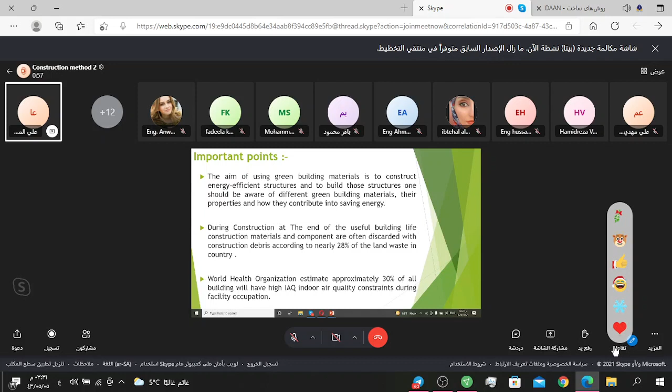Be aware of different green building materials, their properties, and how they contribute to saving energy. During construction, at the end of the useful building life, construction materials and components are often discarded, with construction debris accounting for nearly 28% of the land waste in the country. The World Health Organization estimates approximately 30% of all buildings will have higher indoor air quality constraints during facility occupation.

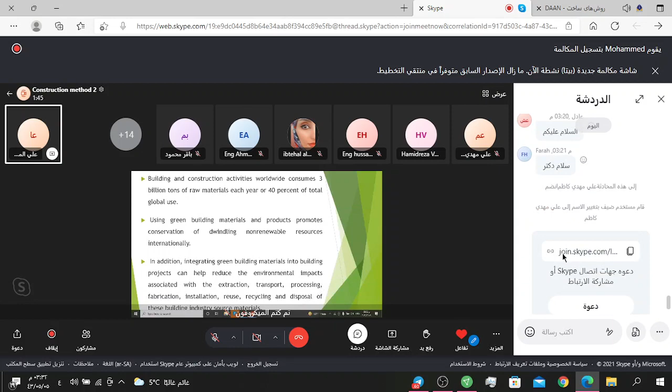Building and construction activities worldwide consume 3 billion tons of raw materials each year, or 40% of total global use. Using green building materials and products promotes conservation of dwindling, non-renewable resources internationally. In addition, integrating green building materials into building projects can help reduce the environmental impacts associated with the extraction, transport, processing, fabrication, installation, reuse, recycling, and disposal of these building industry source materials.

Fundamental principle. Are you hearing me, Doctor? Please.

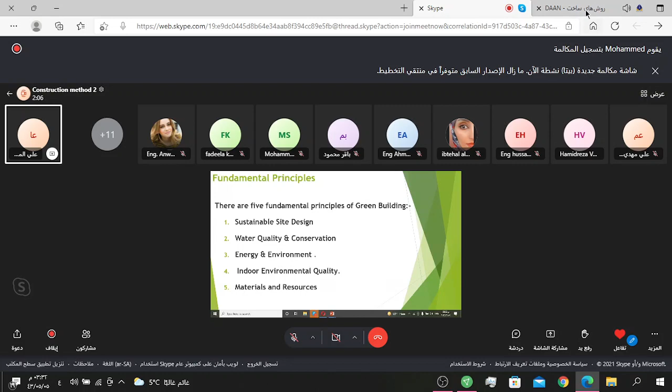There are 5 fundamental principles of green buildings: sustainable site design, water quality and conservation, energy and environment, indoor environmental quality, and materials and resources. Sustainable site design: create minimum urban sprawl and prevent the needless destruction of valuable land, habitat, and open space. Encourage higher density urban development as a means to preserve valuable green space. Preserve key environmental assets through a careful examination of each site.

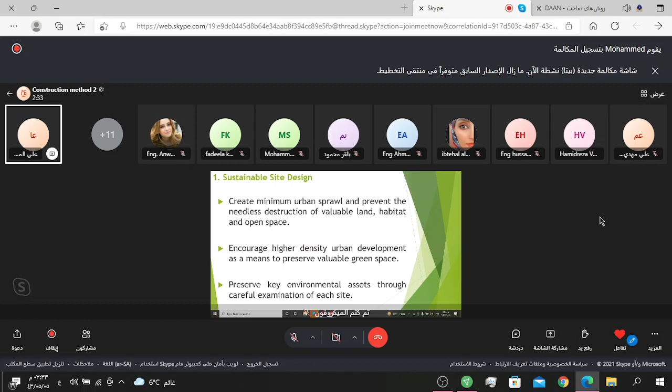Water quality and conservation: preserve the existing natural water cycle and design the site so it closely emulates the site's natural hydrological systems. Emphasis on retention of storm water and on-site infiltration, as well as ground water recharging. Minimize the inefficient use of potable water on the site, while maximizing the recycling and reuse of water, including rainwater harvesting, stormwater, and grey water.

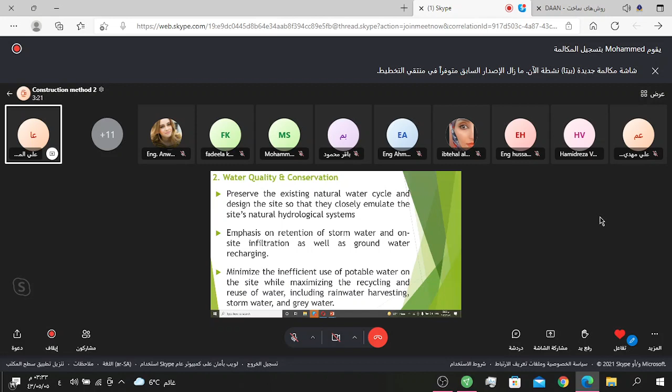Energy and environment: minimize adverse impact on the environment through optimized building siting and design, material selection, and aggressive use of energy conservation measures. Maximize the use of renewable energy and other low impact energy sources. Building performance should exceed minimum international energy code compliance levels by 30 to 40%.

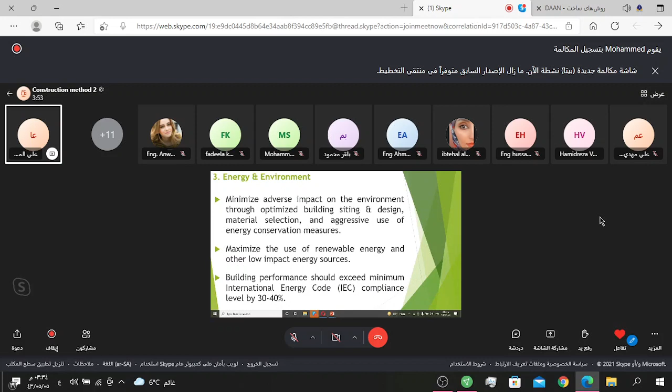Indoor environmental quality: provide a healthy, comfortable, and productive indoor environment for building occupants. Utilize the best possible conditions in terms of indoor air quality, ventilation, and thermal comfort, including access to natural ventilation and daylighting.

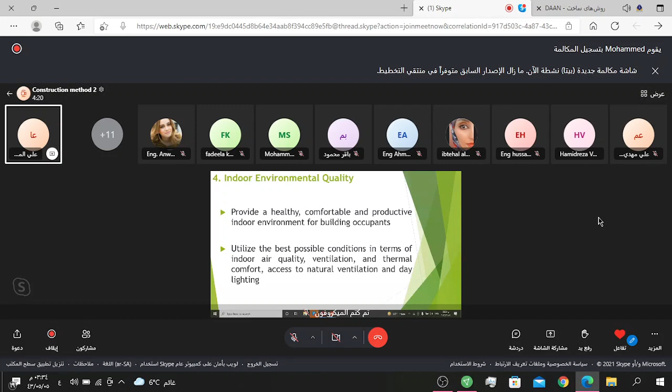Materials and resources: minimize the use of non-renewable construction materials through efficient engineering and construction and effective recycling of construction debris. Maximize the use of recycled materials, modern energy efficient engineering materials, and resource-efficient composite type structure systems, as well as sustainably managed biomass materials.

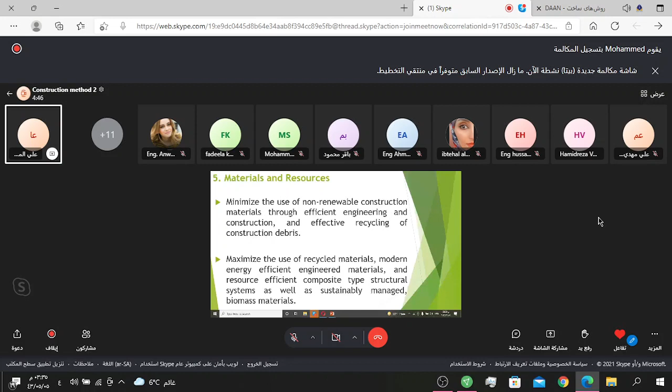Materials are okay. Selection criteria for green building: resource efficiency, indoor air quality, energy efficiency, water conservation, affordability.

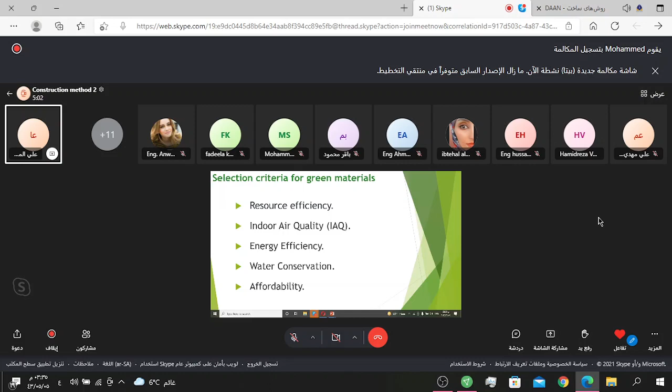Resource efficiency: recycled content. Products with identifiable recycled content, including both post-industrial content with a preference for post-consumer content, natural and renewable material harvested from a sustainably managed source, and verifiable having independent certification, for example certified wood certified by an independent third party.

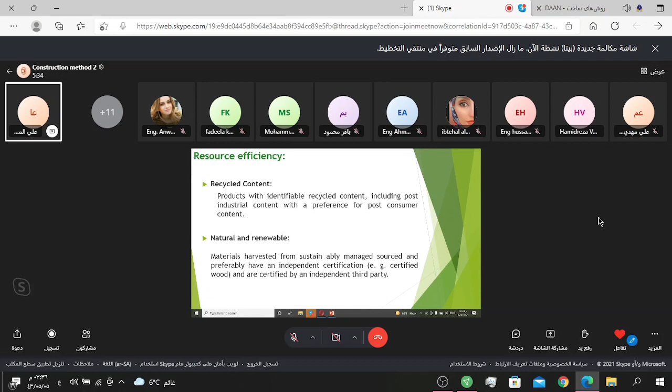Resource efficient manufacturing process: products manufactured with a resource efficient process, including reducing energy consumption, minimizing waste, recyclable and/or source reduced product packaging, and reducing greenhouse gases. Locally available building materials and systems found locally generally save energy and resources in transportation to the project site. Refurbished or remanufactured products include saving materials from disposal by repairing, restoring, or otherwise improving the product's performance, quality, functionality, or value.

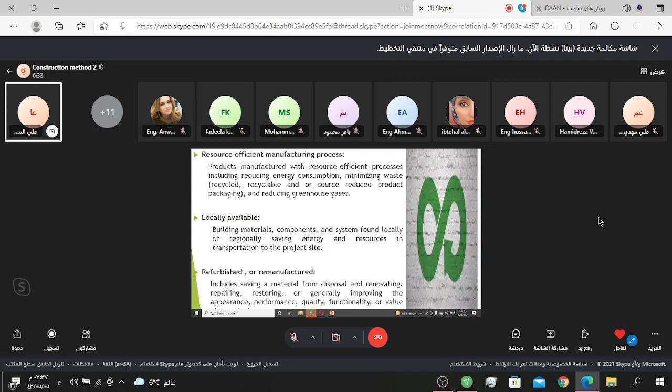Indoor air quality. Minimal chemical emission.

Products that have minimal emission of volatile organic compounds, and also maximize resource and energy efficiency while reducing chemical emissions. Moisture resistance: products and systems that resist moisture or inhibit the growth of biological contaminants in a building. Healthfully maintained materials, components, and systems that require only simple, non-toxic, or low volatile organic compound cleaning.

System or equipment: products that promote indoor air quality by identifying indoor air pollutants or enhancing air quality.

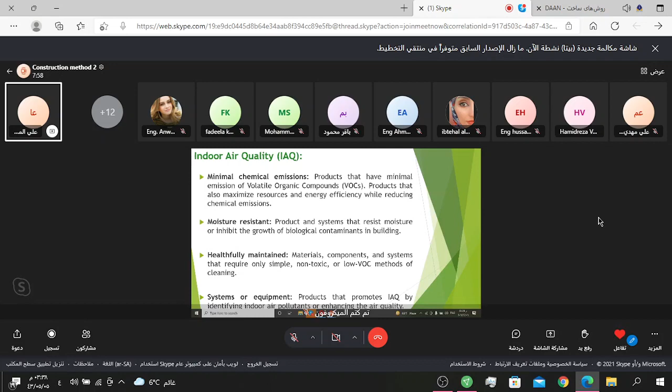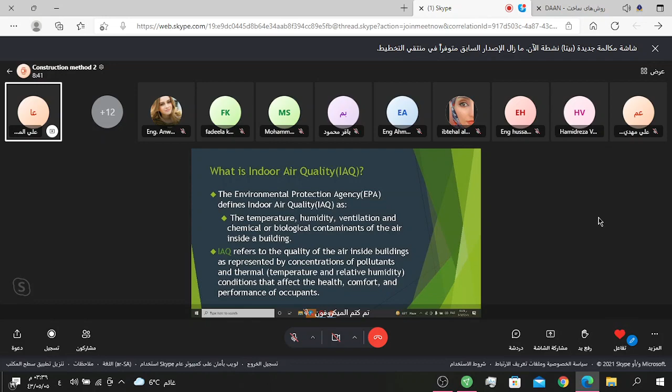What's indoor air quality? The Environmental Protection Agency defines indoor air quality as the temperature, humidity, ventilation, and chemical or biological contaminants of air inside a building. It refers to the quality of the air inside the building as represented by concentrations of pollutants and thermal temperature and relative humidity conditions that affect the health, comfort, and performance of occupants.

Energy efficiency: materials, components, and systems that help reduce energy consumption in buildings and facilities. Water conservation: products and systems that help reduce water consumption in buildings and conserve water in landscape areas. Affordability: building product life cycle costs are comparable to conventional materials and are within a project-defined percentage of the overall budget.

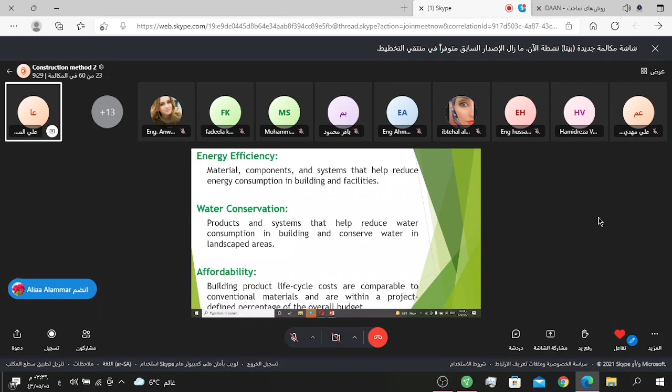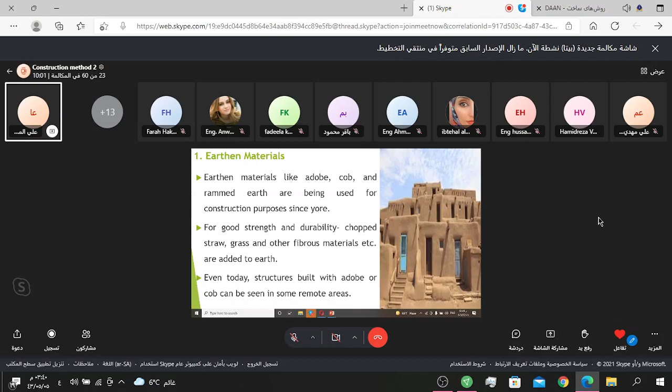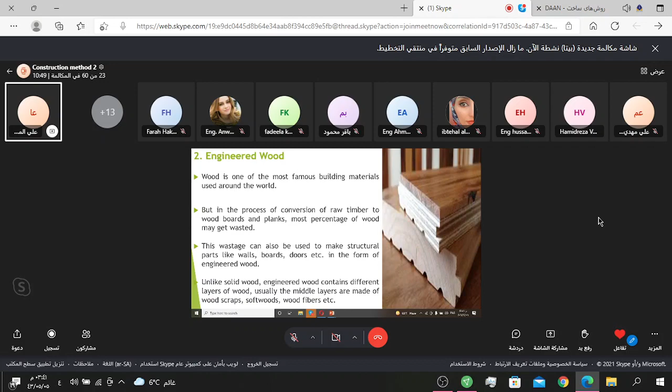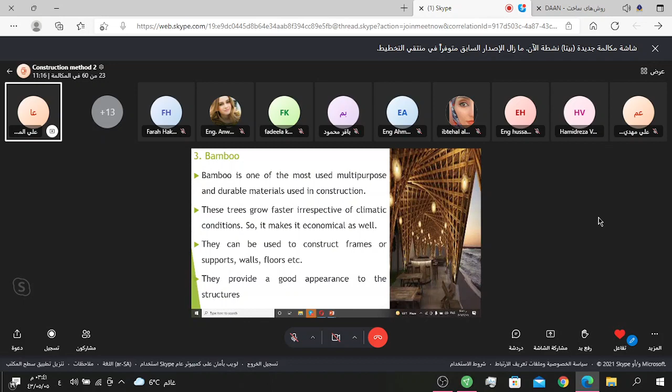Bamboo is one of the most used, multi-purpose, and durable materials used in construction. These plants grow faster irrespective of climatic conditions, which makes them economical as well. They can be used to construct frames or support walls and floors, and they provide a good appearance to the structure.

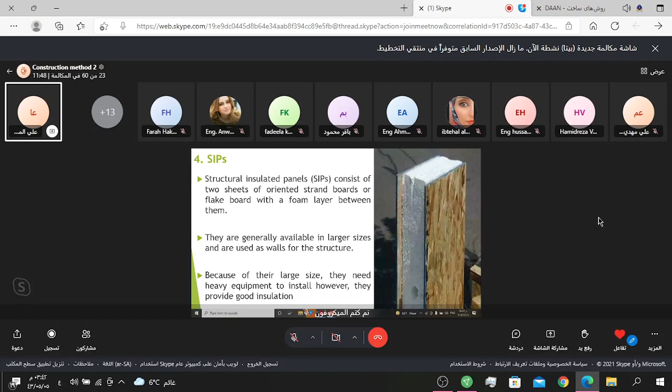Structural insulated panels consist of two sheets of oriented strand board or flake board with foam layers between them. They are generally available in larger sizes and are used for structure. Because of their large size, they need heavy equipment to install. However, they provide good insulation.

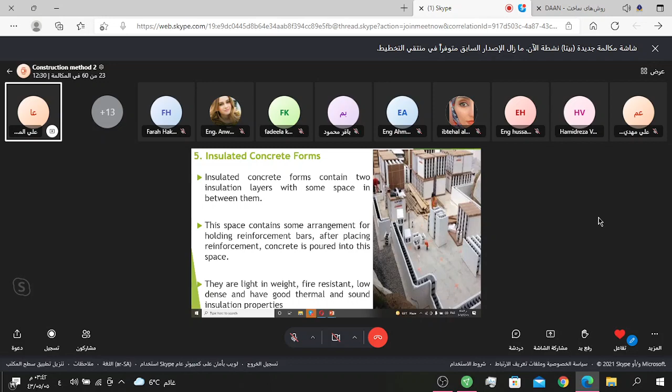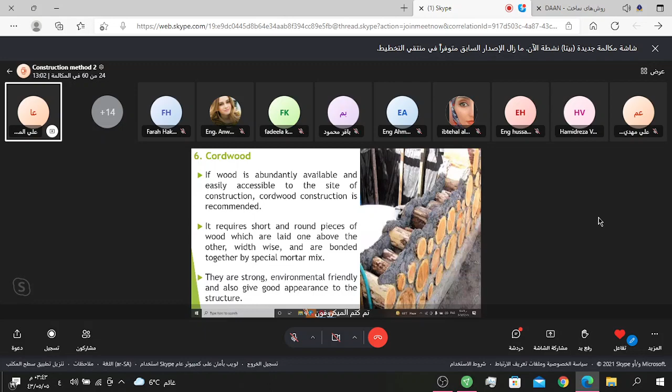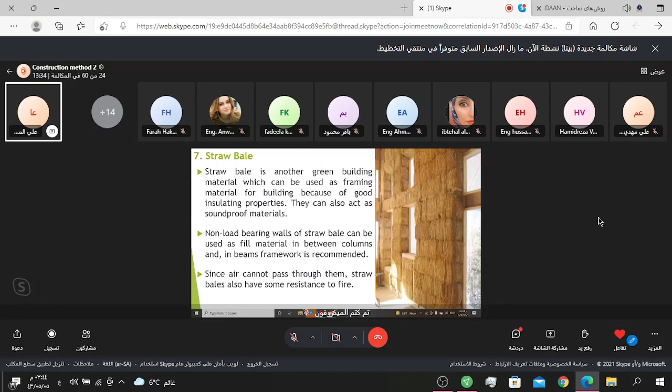Straw bale is another green building material which can be used as framing material for buildings because of good insulating properties. They can also act as soundproof materials. Non-load bearing walls of straw bale can be used as fill material between columns, and in beam framework it is recommended. Since air cannot pass through them, straw bales also have some resistance to fire.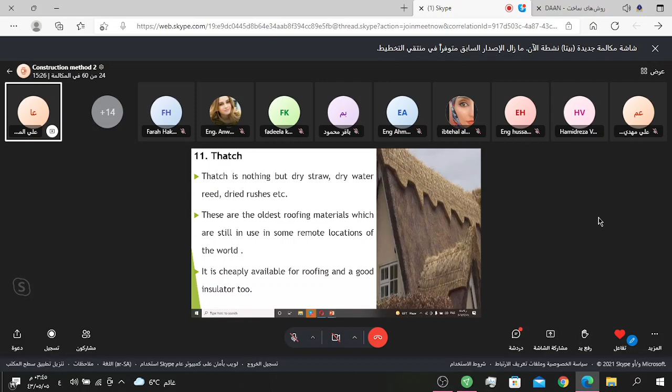Natural fiber, like cotton wool, can also be used as insulation material. Recycled fibers or wool fibers are converted into a batt and installed in preformed wooden frame sections.

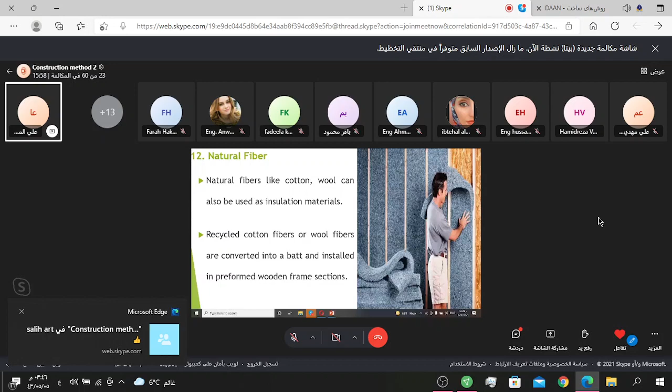Polyurethane foam is available in the form of spray bottles. It is directly sprayed onto the surface or wall where insulation is required. After spraying, it expands and forms a thick layer which hardens later on. It offers excellent insulation and prevents leakage of air.

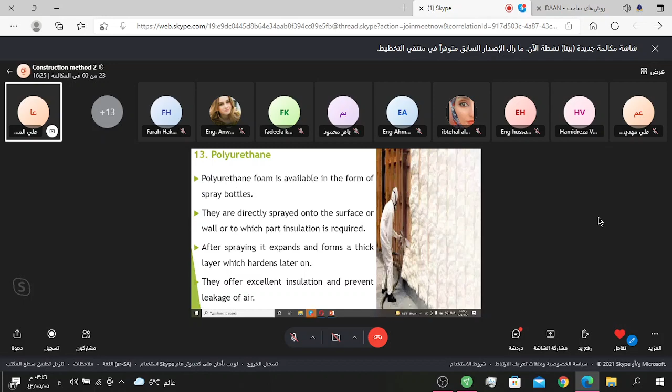Fiberglass is also used for insulation purposes in the form of fiberglass batts, even though it contains some toxic binding agents. Again, because of its superior insulation property at low cost, it can be considered a green building material.

Yes, Doctor. Fiberglass and the other material you explained about — can that cause cancer to the worker or someone who lives over there? There is... excuse me, Doctor, the sound is not clear. My sound is not clear. Yeah Doctor, not clear. Yes Doctor, please, how is it now? I can hear you perfectly. I explained that you explained about the fiberglass, yeah? What's Doctor? Yes. It may cause cancer for the worker or someone who lives over there — it's not suitable for the green building. Okay, yeah, okay Doctor, it's harmful for the... yeah, it's harmful, very harmful for the human over there. Okay, continue, go on please. Okay Doctor.

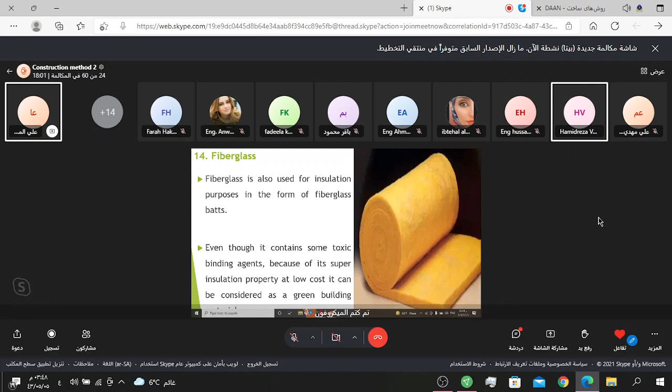Cellulose is a recycled product of paper waste, and it's widely used around the world for insulation purposes in structures. It acts as a good sound insulator and is available at cheap prices in the market.

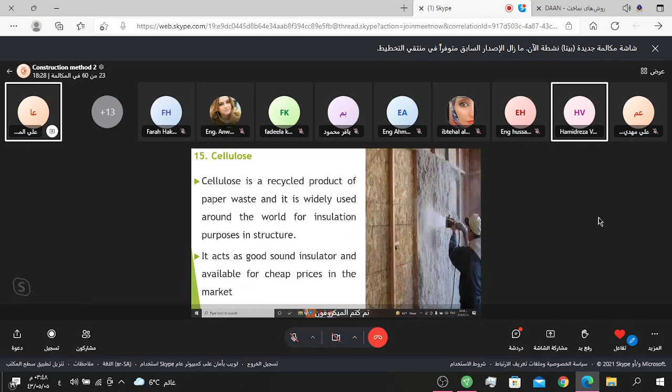Cork is also a good insulator. Boards or panels made of cork are available in markets. A great amount of electrical energy can be saved by cork board insulation in the winter. These cork boards are also good for sound insulation.

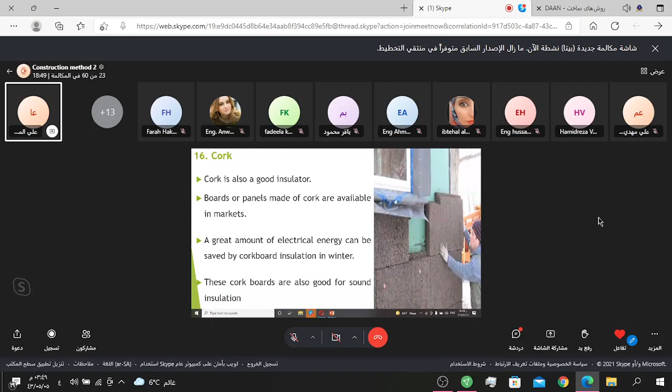Natural clay plastering of walls can be done using natural clays rather than other gypsum-based plasters. Natural clay plaster, with proper workmanship, gives a beautiful appearance to the interior.

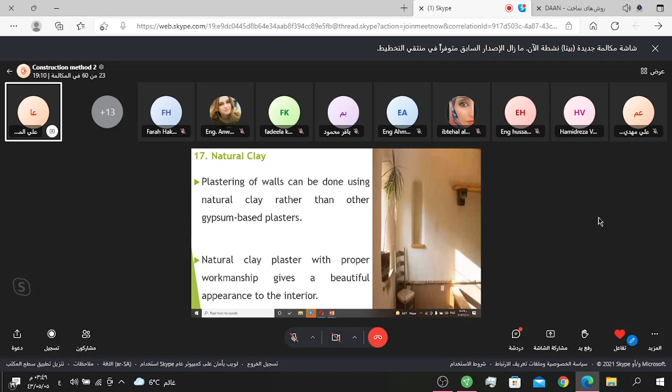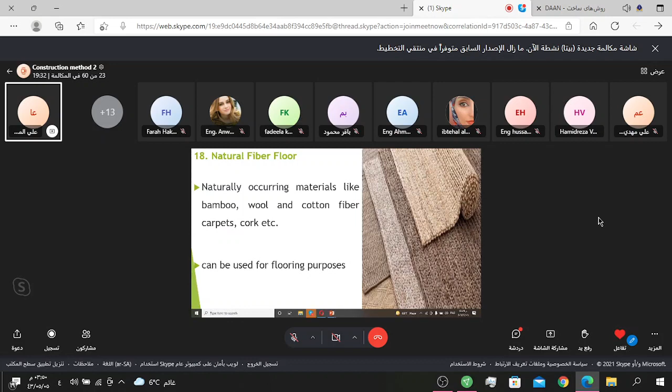Natural fiber flooring materials like bamboo, wool and cotton fiber carpets, and cork can be used for flooring purposes.

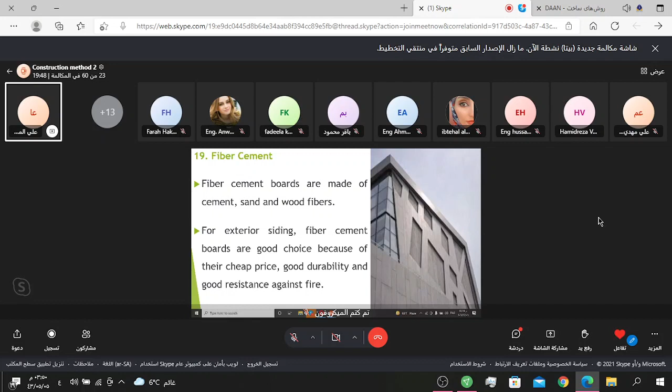Fiber cement boards are made of cement, sand and wood fibers. For external siding, fiber cement boards are a good choice because of their cheap price, good durability, and good resistance against fire.

Stone is a naturally occurring and long-lasting building material. Some stone structures built hundreds of years ago are still in existence without much abrasion. Stone is good against weathering, hence it can be used for construction, exterior walls, steps, and exterior flooring.

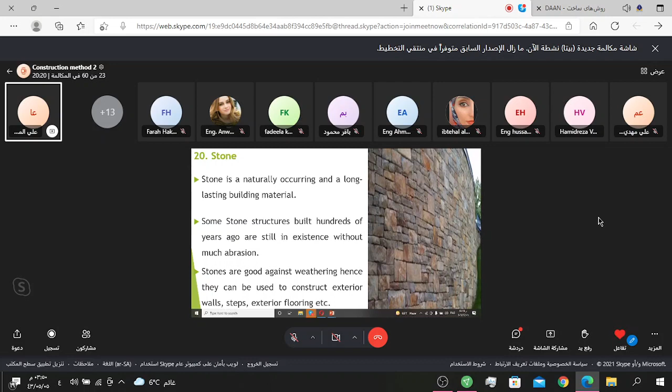Conclusion: eco-friendly or natural products ensure safety from dangerous chemicals and allow families to avoid risky additives that can cause health issues. Using eco-friendly products improves quality of life in terms of mortality, age, diseases and illnesses. They ensure the safety of families and the planet.

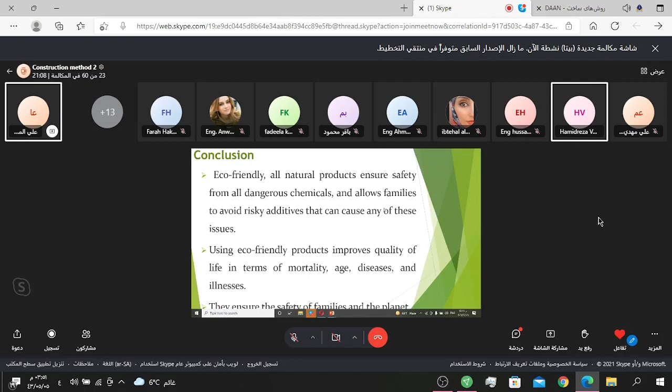Thank you, Doctor. Thank you very much, my friend Ali. Yes, Doctor, very good. Ali, can you hear again, Doctor? That's a very good presentation — you explained about various materials in green building, but you also mentioned that some of them, such as fiberglass and another one, were very harmful for humans. So it's very good, your point is 95. Thank you very much. Thank you, Doctor, thank you very much. Thank you very much, thank you for your good presentation. Thank you, Doctor. You're welcome.